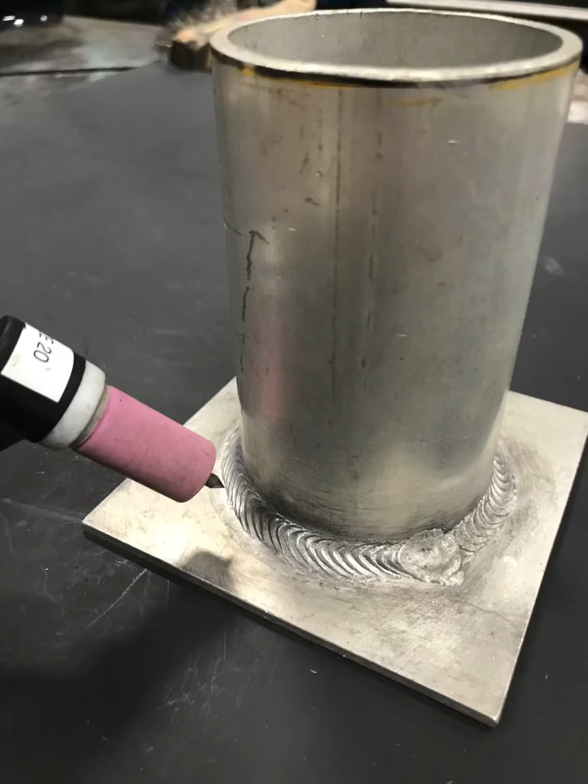Weldzcool. This is another video, a follow-up to the first position video that we made. That first video covered basically sheet and plate flat metal. So now we're going to dive into a couple of other positions related to welding.

We're going to start here with pipe, something rounded. We're still going to use our numbers 1 through 6, and then G for groove, so your pipe is a groove weld. We'll start at the top. You can see we have a 1G, and that says to rotate. A 1G means the pipe is horizontal but not in a fixed position, so we can weld a little where it's relatively flat, rotate, weld, rotate, weld, and so on. That is a 1G roll weld.

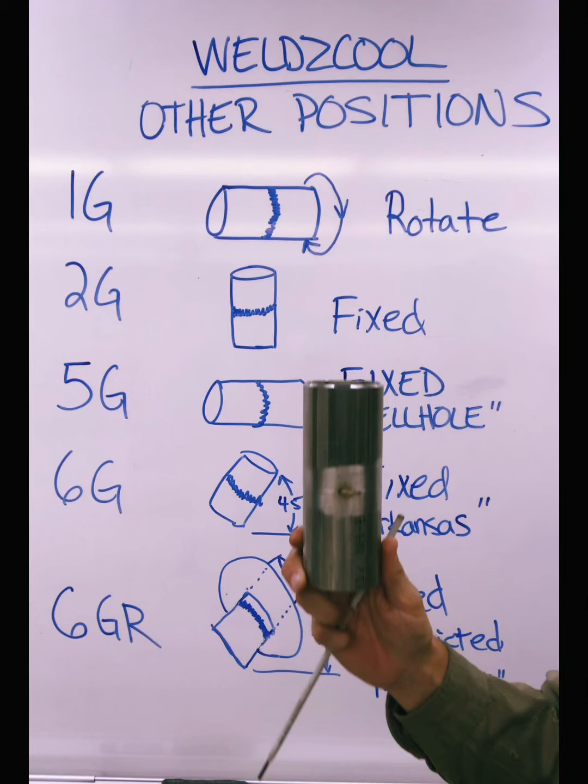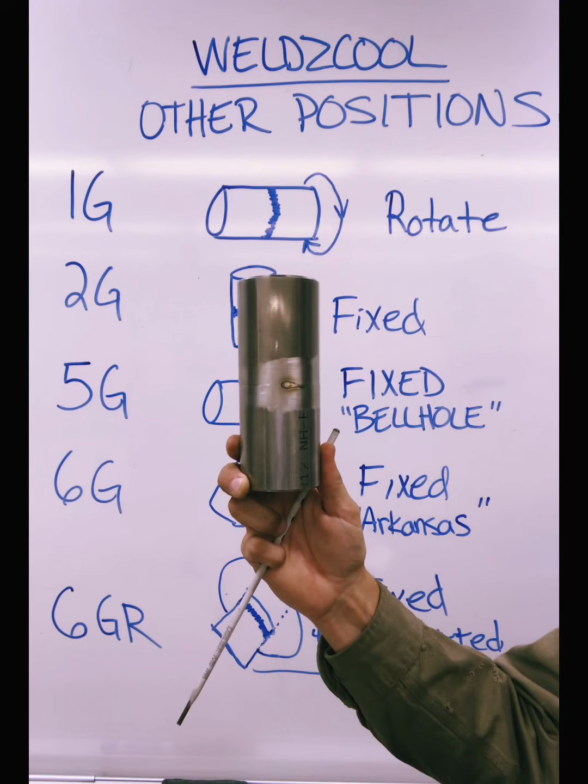The second position is 2G. Just like 2G or 2F from the first video, we're talking about something horizontal. Here we have 2G with the pipe in a fixed position, locked into place, like you'd see putting pipe into a factory, school, or hospital. The pipe runs vertical, maybe from one floor to the next. It's locked into position, and we weld across. The pipe won't spin for us, it's locked in, and we weld all the way around it. That's your 2G. There is no 3G, there is no 4G.

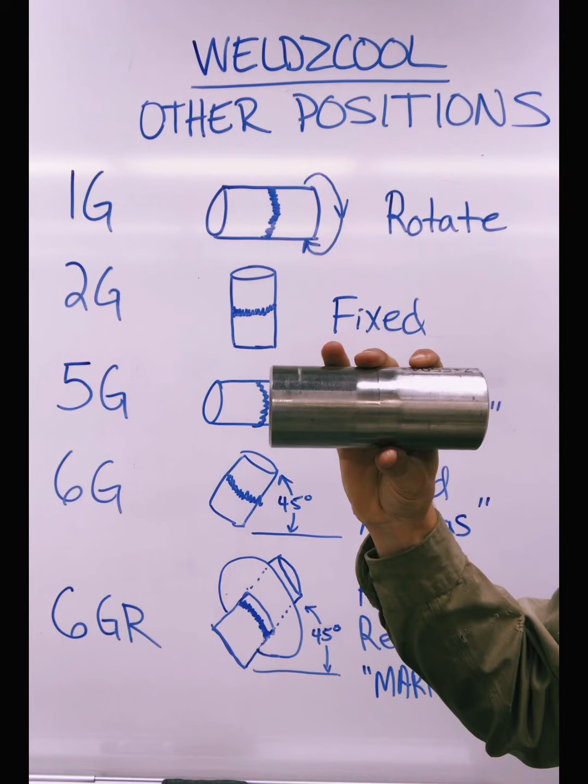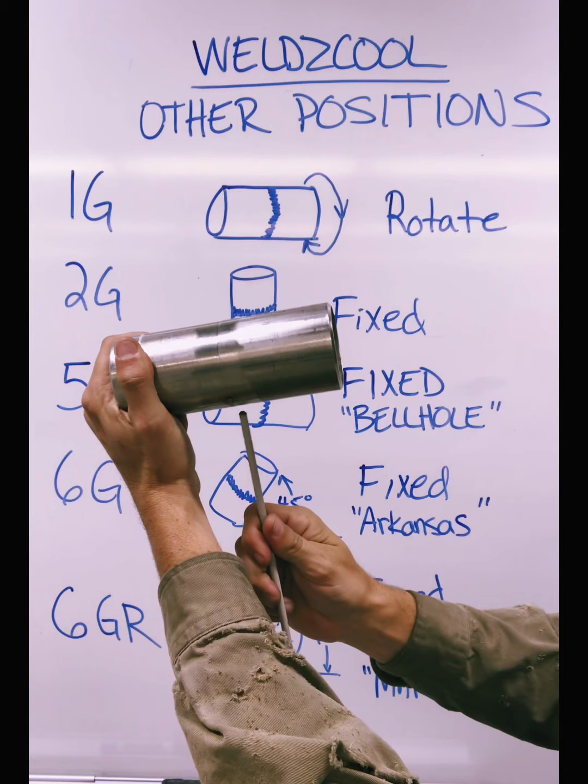So we hop right to what we call 5G. A 5G is basically the same as our 1G, except now we're talking about a fixed position. Again, in a hospital or factory putting in pipe, we went 2G up, then maybe got a 90-degree angle and now we're running pipe horizontally. This time we're in a fixed position, which means for 5G we have to weld a little overhead, a little vertical, and a little flat. That's what makes 5G tougher than 1G and 2G, because it incorporates all these different angles.

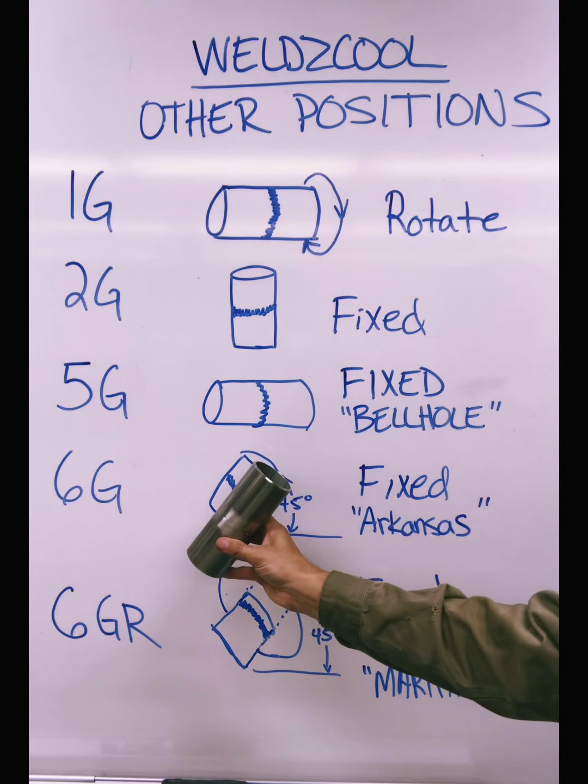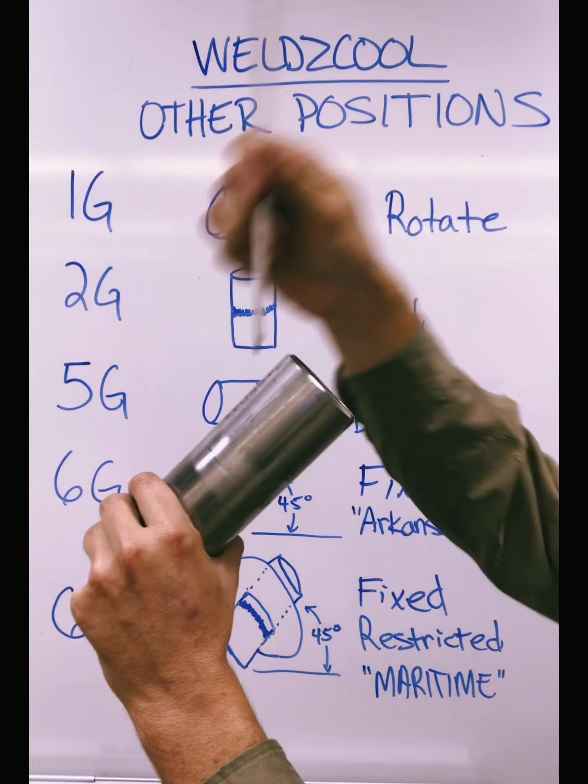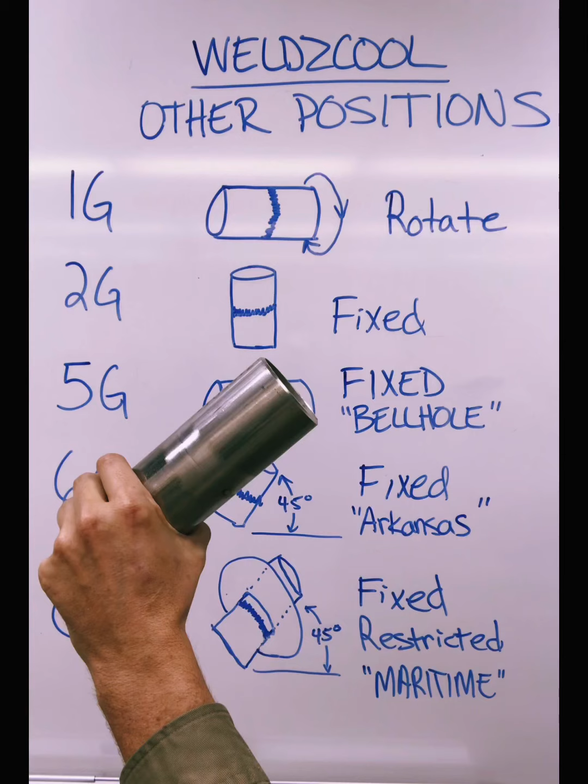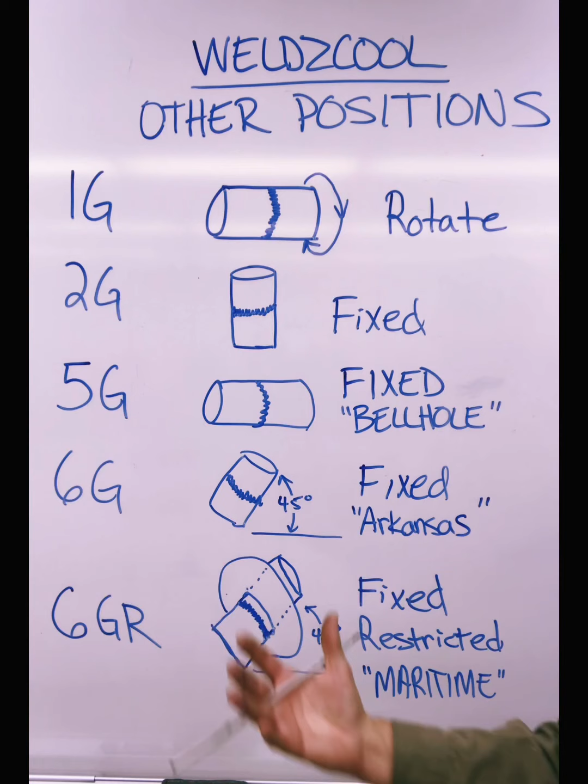The next one is 6G, commonly the testing position for pipe, locked in at a 45-degree angle. It gives you some overhead, a little vertical going up, and almost like flat. However, instead of staying in the same plane, the plane keeps changing. We're going vertical but moving across on that 45-degree angle. That's the 6G typical testing position. You might not see too many 6Gs out in the field when actually welding, but this is the ultimate test. Then the last one is 6GR.

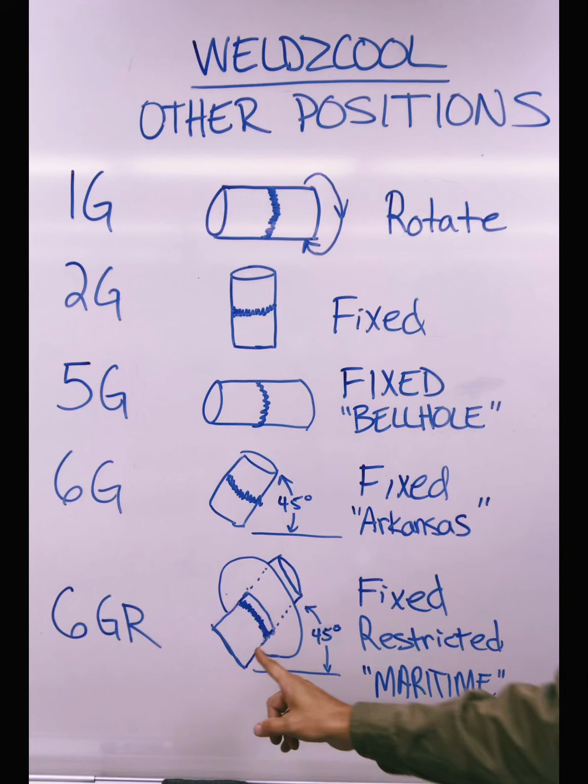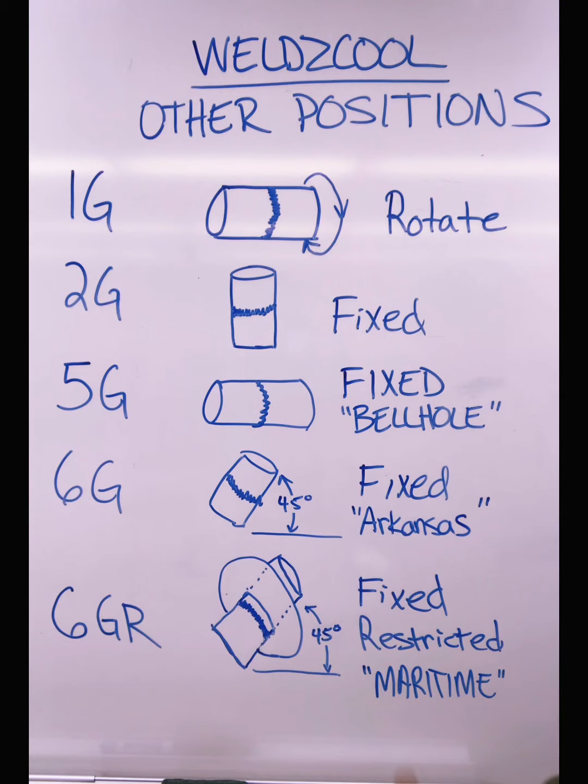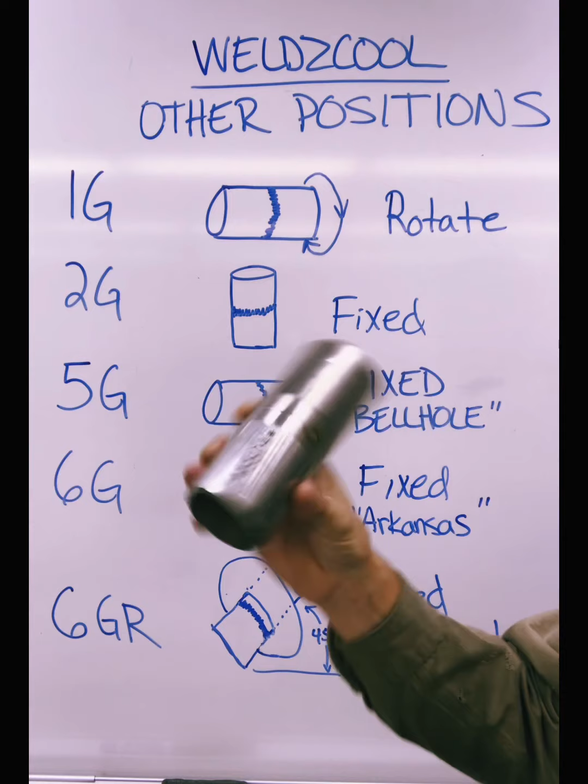Same thing, locked in at a 45-degree angle, except this time for testing we have a plate about three-quarters of an inch above your weld joint, meaning it's restricted. So when trying to make this weld, you have this giant plate in your way. We call that the maritime test. That wraps up our pipe positions: 1G rotated, 2G fixed, 5G locked into place, 6G at a 45-degree angle locked in, and 6GR the same thing with a restrictor plate.

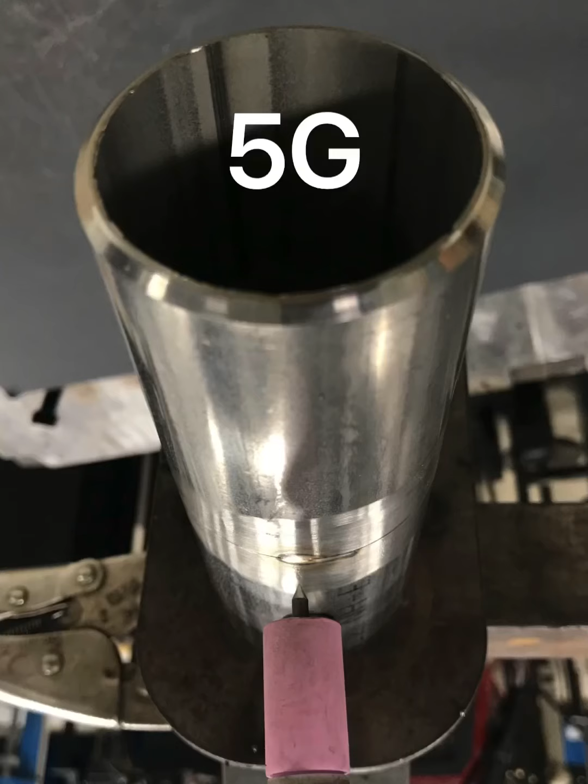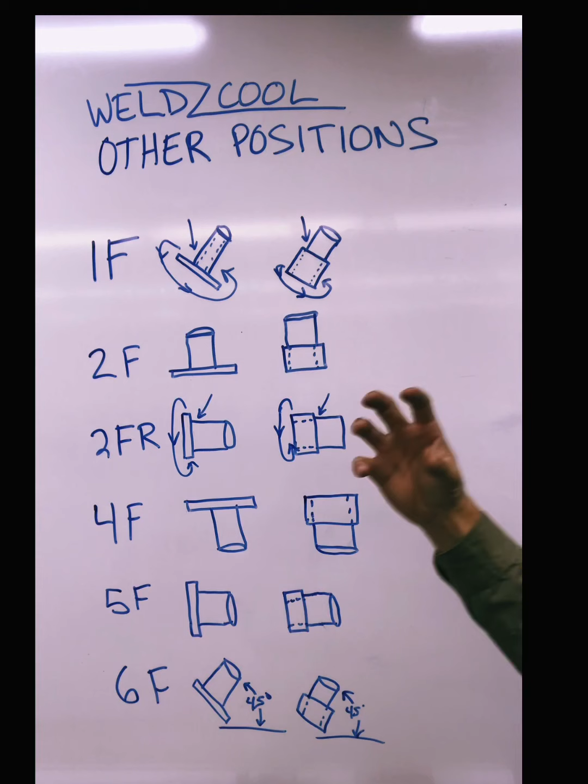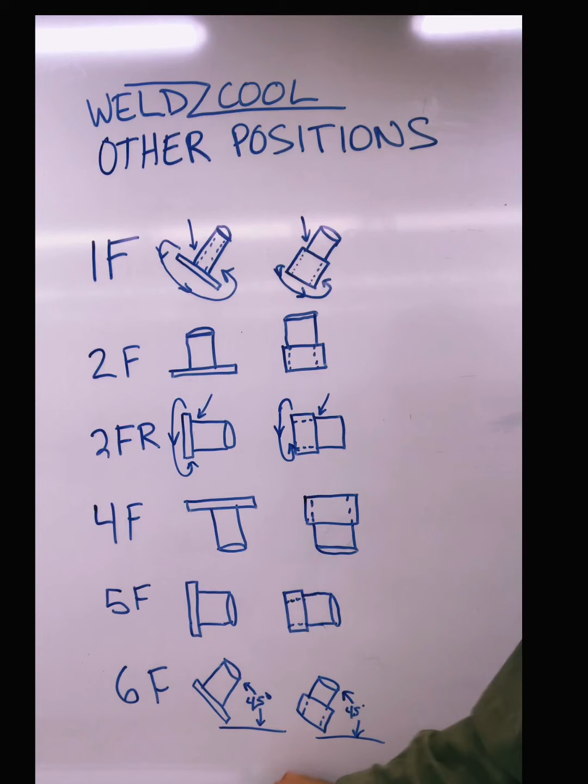We're going to continue with the second part of this video. We first talked about pipe, and now we're talking about pipe or tubing welded to plate in different positions. This column is what we call socket welds. You have a fitting that's a little larger, the pipe slides into the fitting, and it creates a type of fillet. So we have F for all of these, meaning a fillet. Remember, any type of fillet makes some type of triangular weldment, something like that, doesn't really matter.

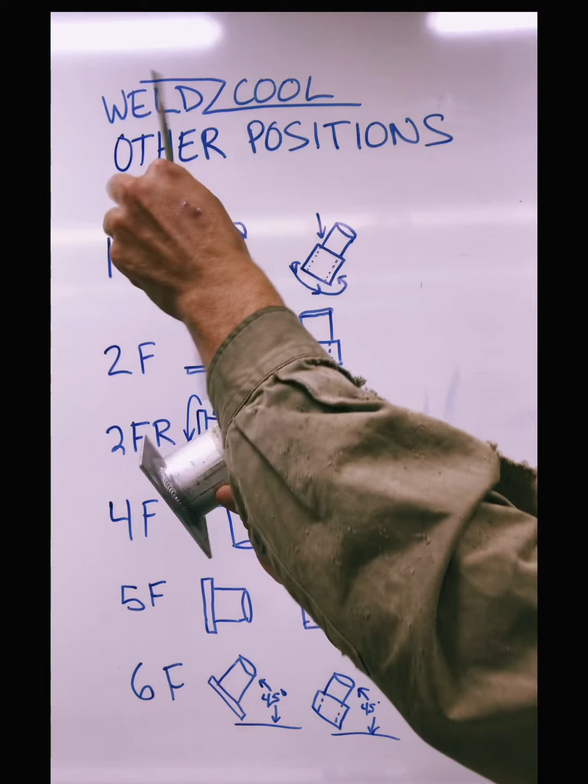This pipe could come off on an angle, though I'm not so sure you'd want that for a socket weld. But the point is, they are fillets, and we're going to talk about 1F, 2F, 2FR, 4F, 5F, and 6F. We'll start with 1F. Remember, anything that's 1 is flat. We have this component on an angle where the rod can come straight up and down, so it's flat. We rotate, we weld, we rotate, we weld. Same thing applies to the socket weld.

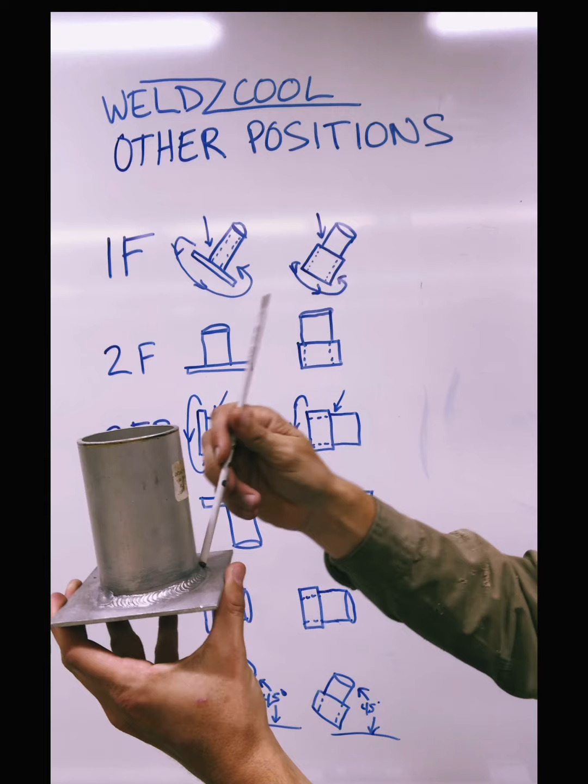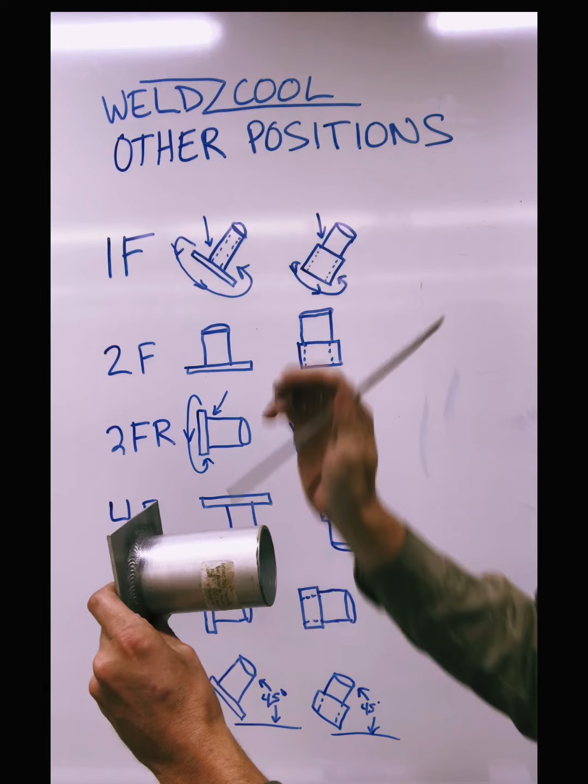2F is horizontal, just like that first video where we talked about 2F on plate. Same idea, except we're going around in a circle around some type of pipe or tubing. 2FR is going to be like this, just like this position, except we can weld, rotate, weld, rotate, weld, and so on. So 2F rotated, that's the R this time. It's not restricted.

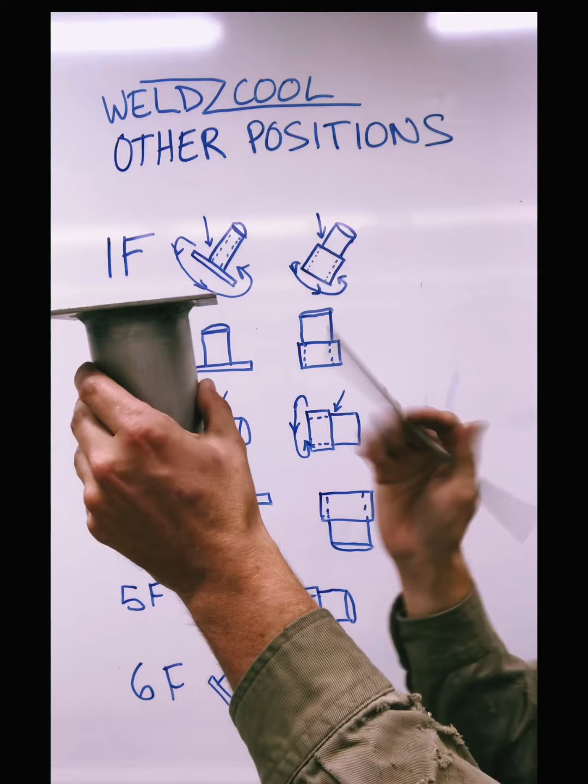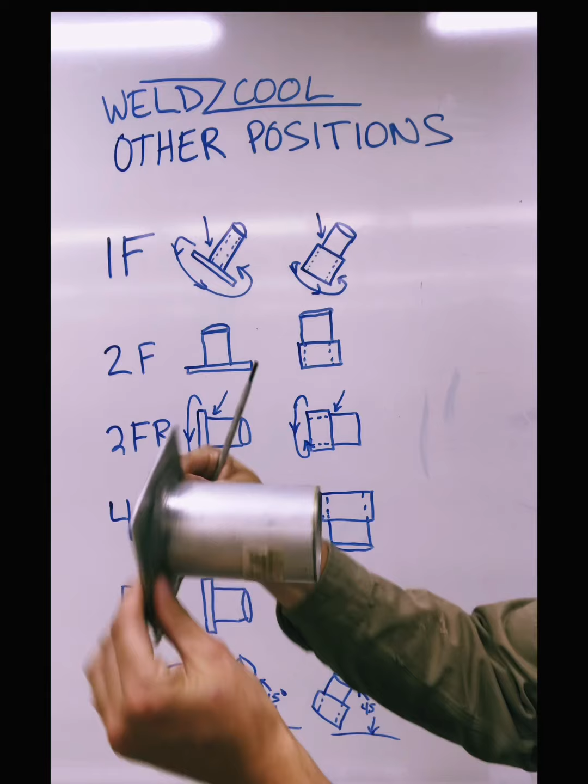4F is going to be overhead here. We have 5F, which means this looks similar to our 2FR, except we can't rotate this time. We're locked into position, so we're dealing with a little overhead, a little vertical, and a little flat in there.

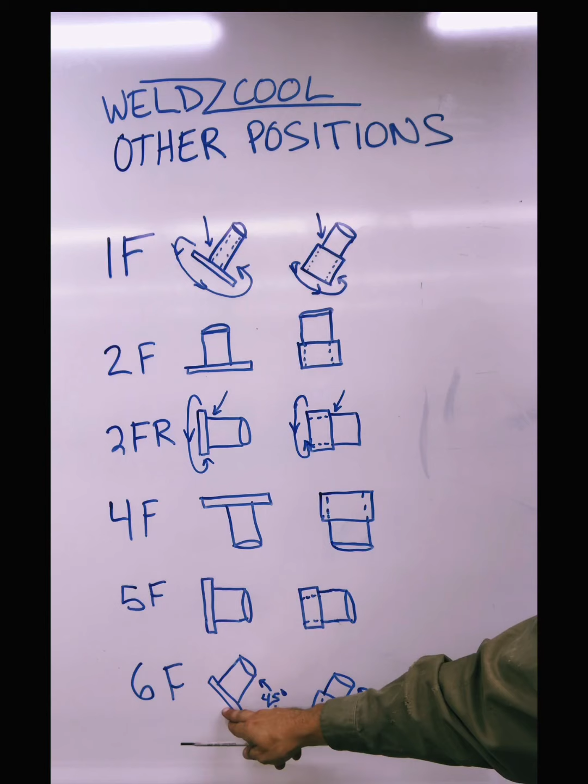Then we finish off with 6F. Same thing applies, we're talking about a 45-degree angle, whether the pipe or tubing is on the plate or it's a socket weld. We lock this in at 45 degrees. We get something that appears to be a little overhead, a little vertical, and flat, but it's not on a straight plane like the 5F, it's on that 45-degree angle. So that wraps them up.

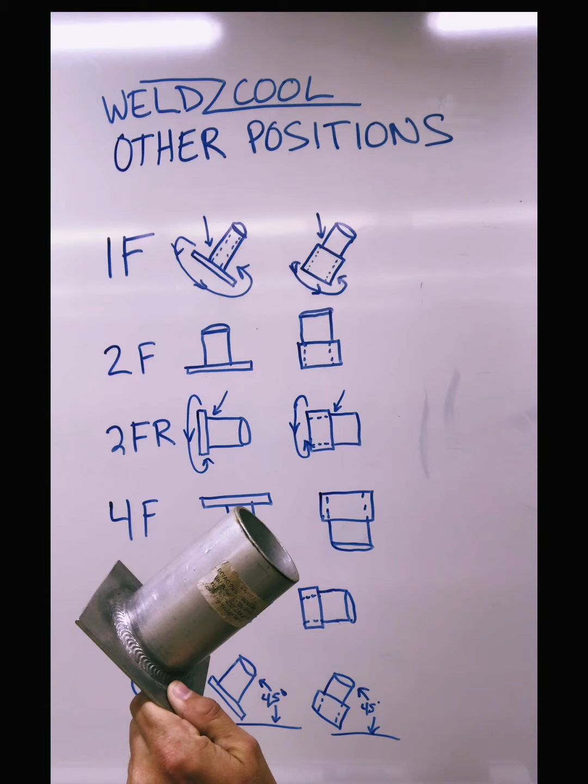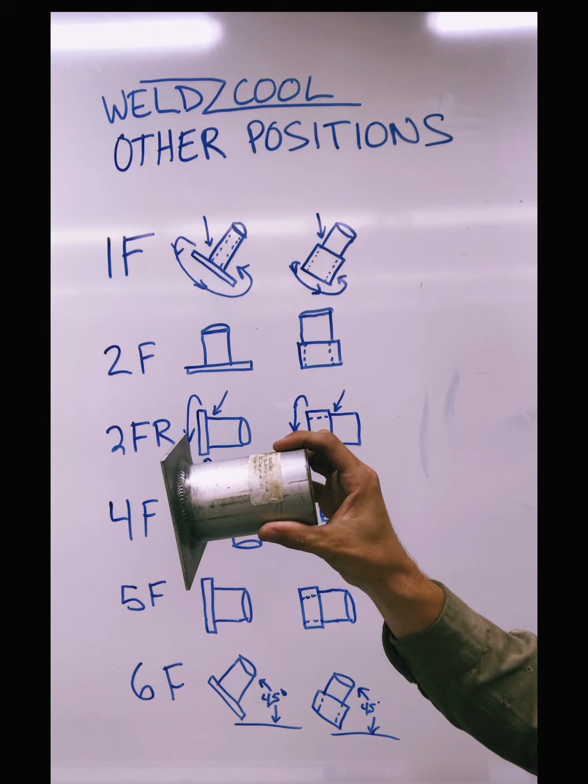We have 1F rotating, top-down welding; 2F locked into position; 2FR rotated; 4F, like an overhead; here's your typical 5F; and a 45-degree angle for your 6F.